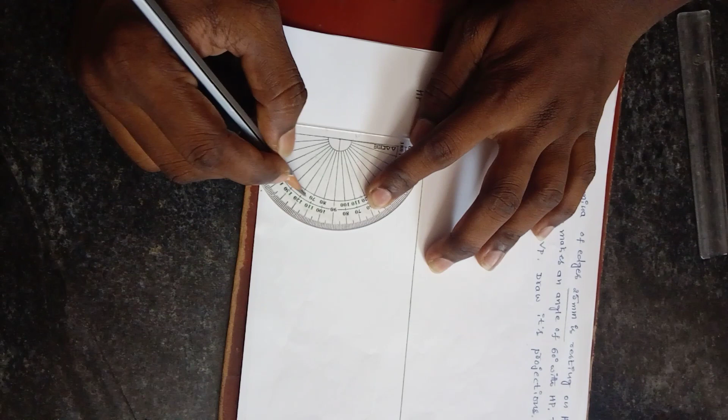Draw the pentagon according to the exterior angle method. The exterior angle of a pentagon is 72 degree. Measure from this side 0, 10, 20, 30, 40, 50, 60, 70, 72. Mark this point. One more from this end of the line: 0, 10, 20, 30, 40, 50, 60, 70, 72. Draw the thin line, then one more.

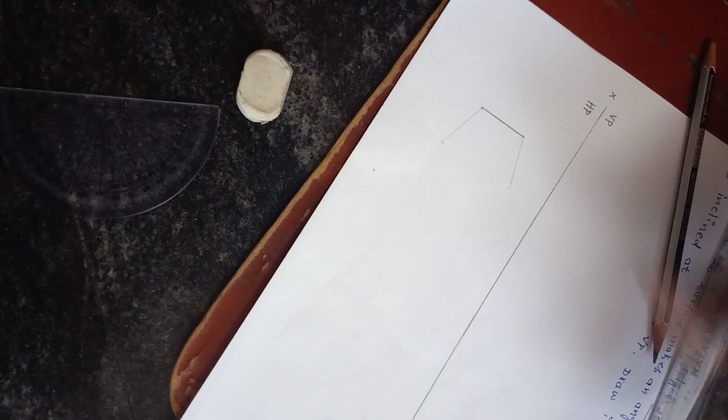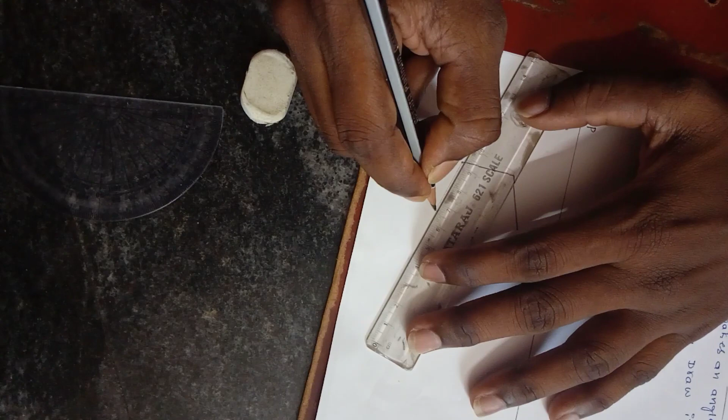By using compass, measure 25 mm of the line, cut it on the straight line, one more and one more. Okay, erase the extra length of the line. Draw a dark line up to this 25 mm line. Once again, by using compass, take this length of the line. We know that the length of the line is already 25 mm.

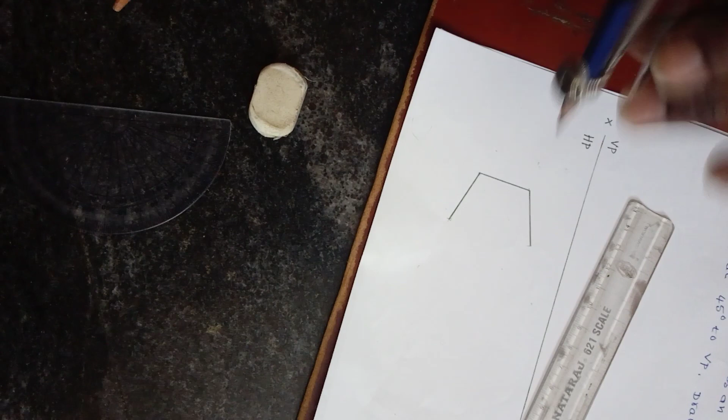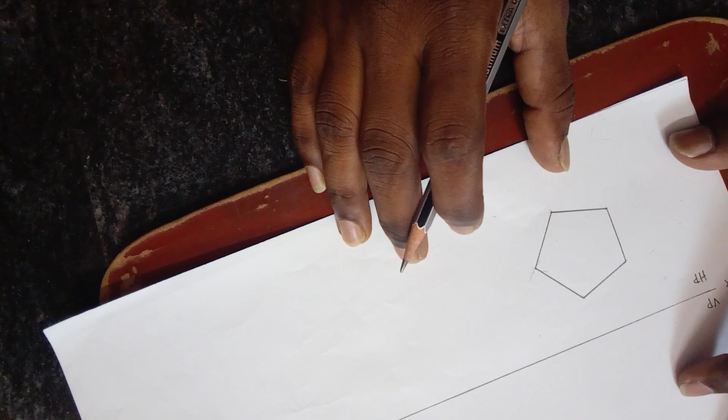Place the needle point, draw an arc, place the needle point here, draw one more arc where two arcs are cut. From this point, draw a line up to this point, draw a line up to this point. Right, now our pentagon is ready. Mark the points, means corners, since it is in HP. Top view A, B, C, D and E, and show one of the length

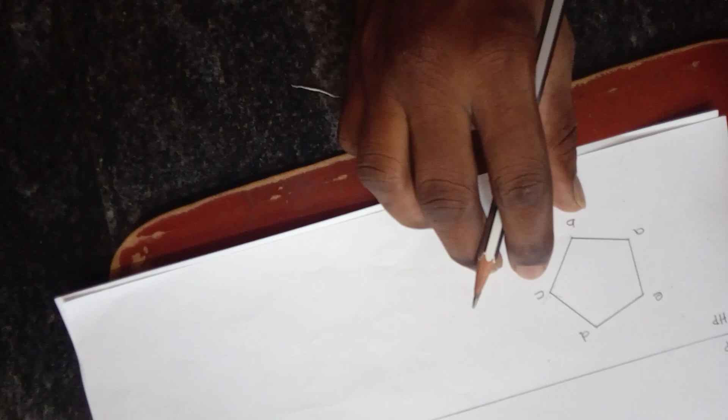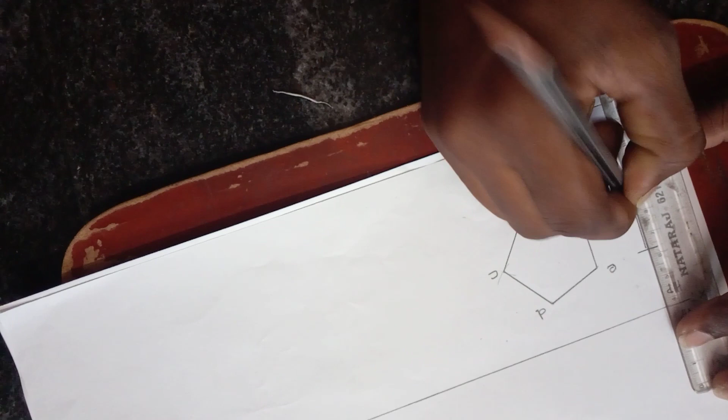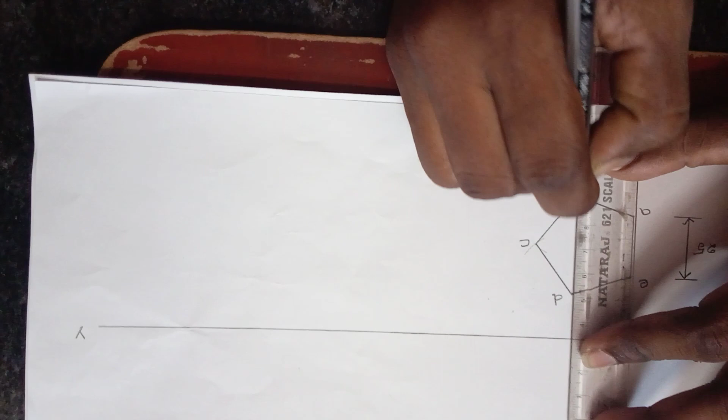of 25 mm. Now draw the projections from every corner up to XY line. The projection line passing from B corner also passes through D corner. Then one more from C.

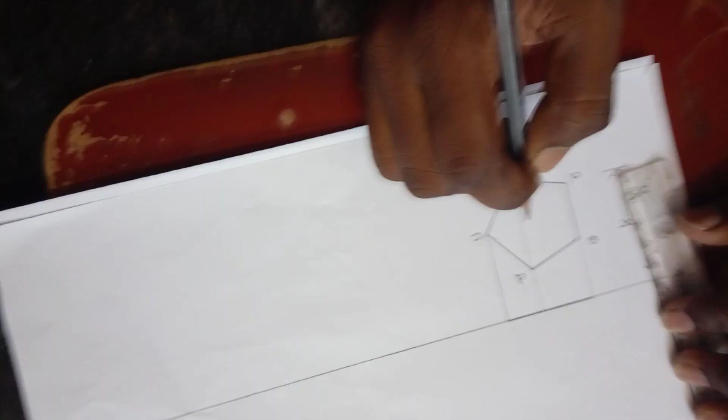Now when I look from this side, you are seeing the line which is the median of this pentagon. Mark this line as thick, but this is not a side of this pentagon, okay, which is in front view. When I look from this side, I am able to see only three corners, means A, B, C. I will write the first one. This is A dash, this is B dash, this is C dash.

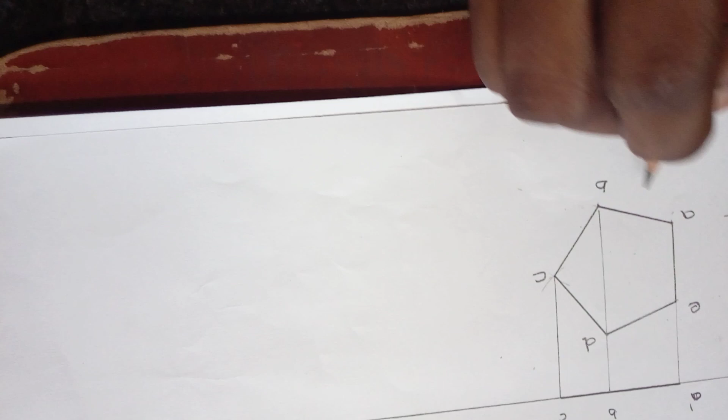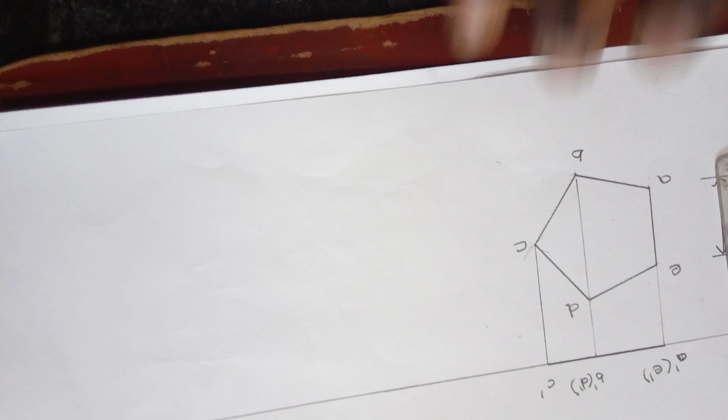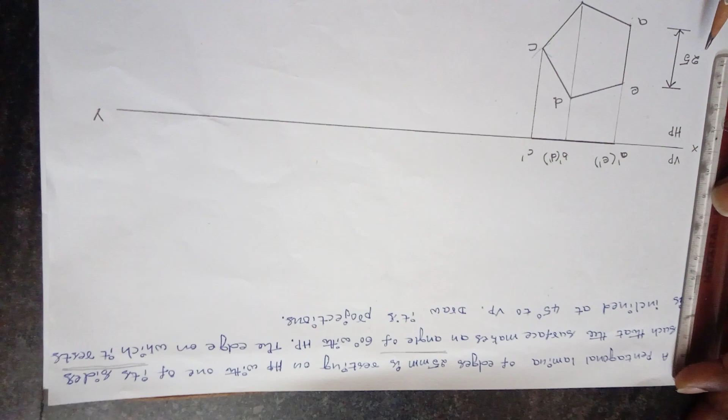While considering E and D, these are not visible, these are hidden in A and B. That's why I will keep in bracket E dash and D dash. Okay, first position is over. In the next condition, he has given two angles: one is 60 degree with HP and 45 degree with VP. Presently, we have to draw the angle in VP. We can take the HP angle, right?

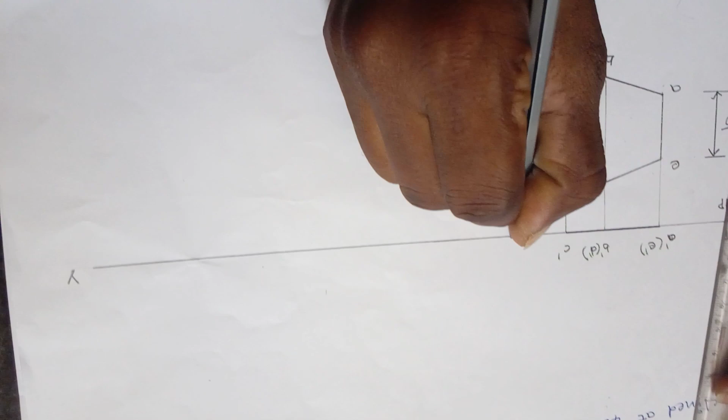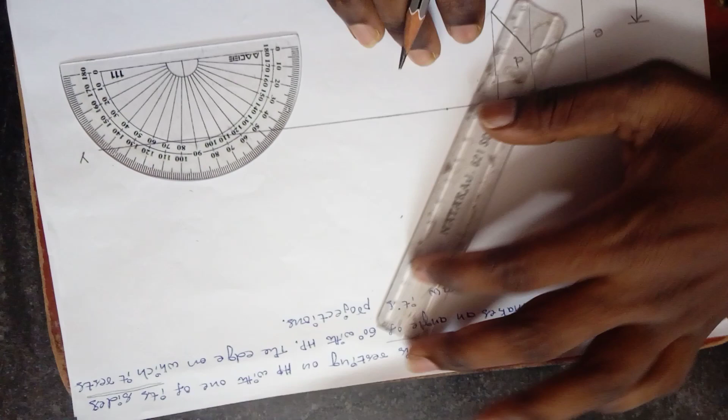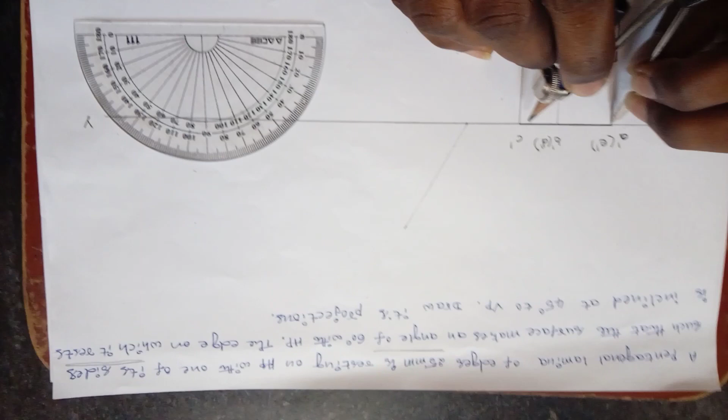I will place one reference point. Presently, I am drawing the angle of a line in VP by considering HP angle, means 60 degree. From this point, I am drawing 60 degree, place a point, draw a thin line, very thin line, right? Now measure length of the line from this point up to here by using compass. Place the needle point at this point, cut an arc on this line, right?

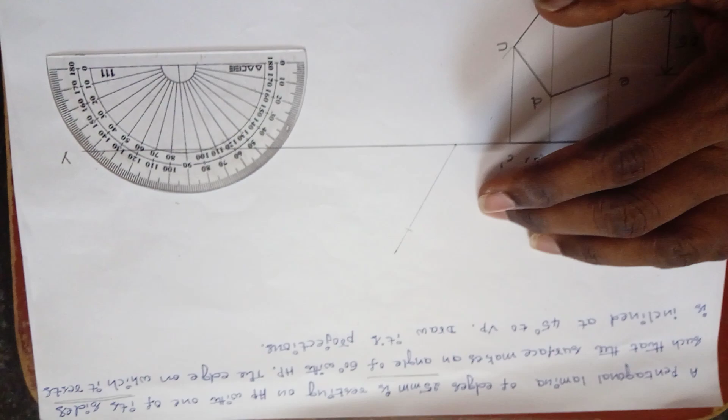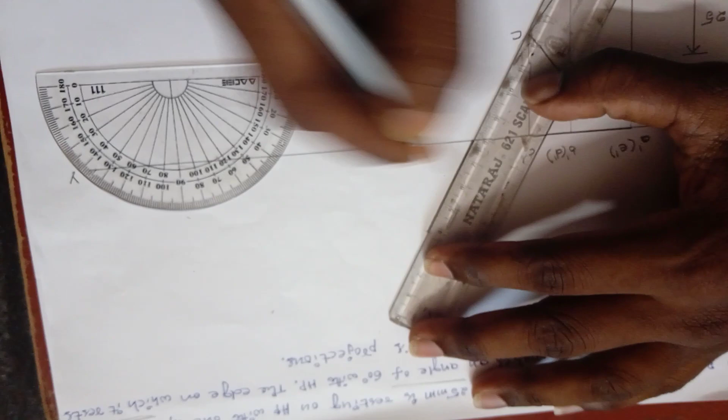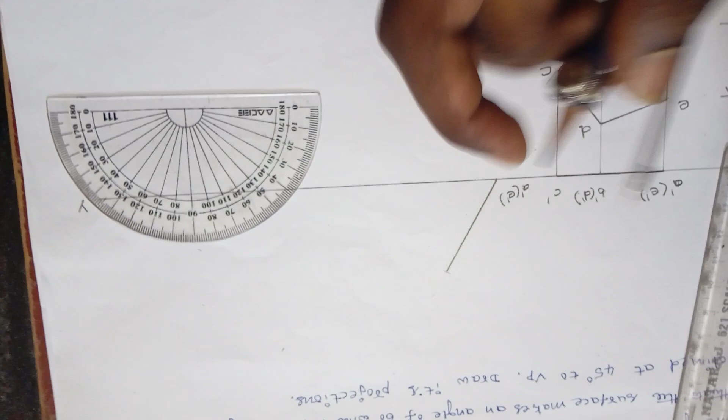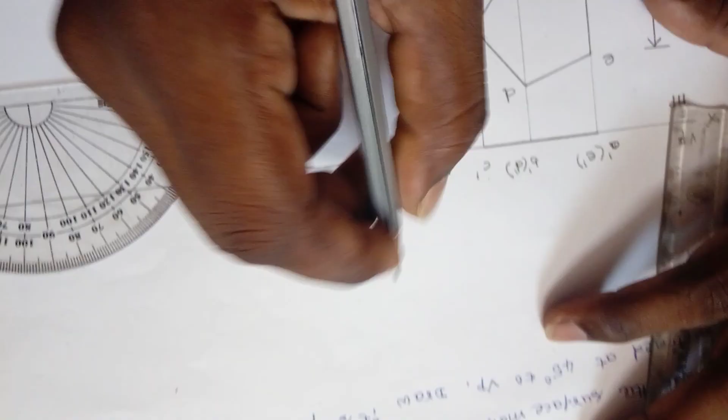Now remove extra length of the line. Make the line dark. This point represents A dash, bracket of E dash. Now I have to find from this point up to this point. Now I'm taking this distance and cut it on this line, right? This point represents B dash and D dash. Next, this point represents C dash. Now this view is over.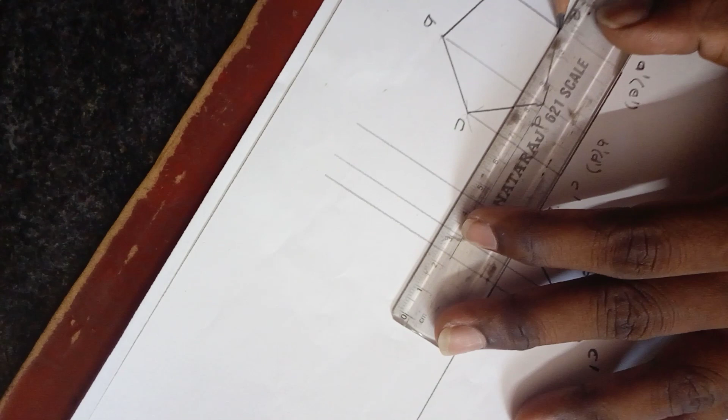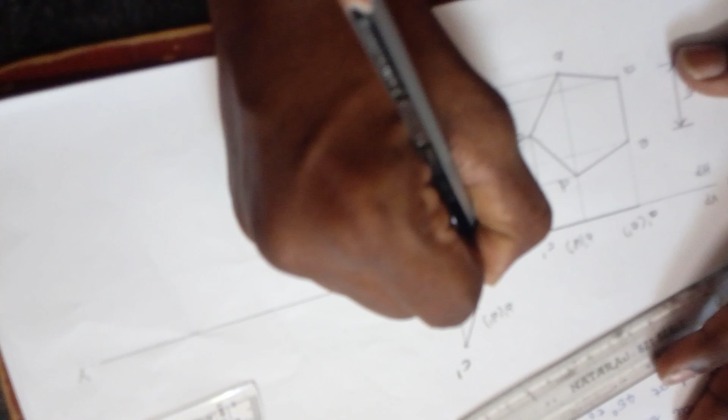Now I want to draw a projection line from VP up to HP. Draw one projection line, very thin lines, one more projection line and one more projection line. Draw projection lines from HP, one projection line, one more projection line, one more, one more and one more. Remove the extra length of the line, unwanted lines. Now mark this angle as 60 degree since it is given in question.

Now I have to put the letters in the second step, where this is A, this is A dash, where A and A dash will coincide. Mark this point as A. In the same procedure, this is B line, this is B dash line, means this is B. Next, this is C line, this is C dash line, C. Then this is D line, this is D dash line, this is D. This is E line, this is E dash line. Mark this point as E.

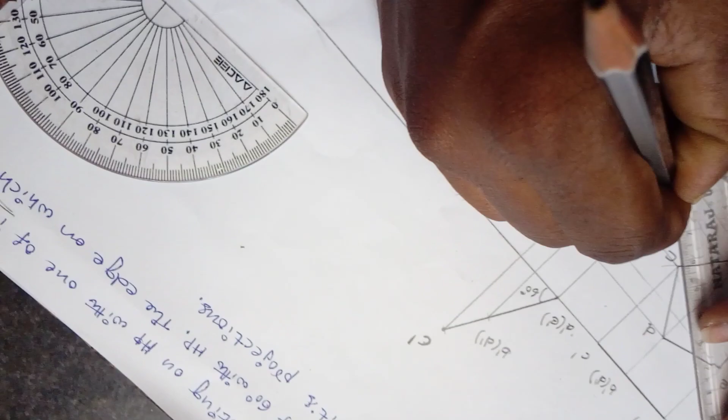Now connect all the points, first A to B, B to C, C to D, D to E, then E to A.

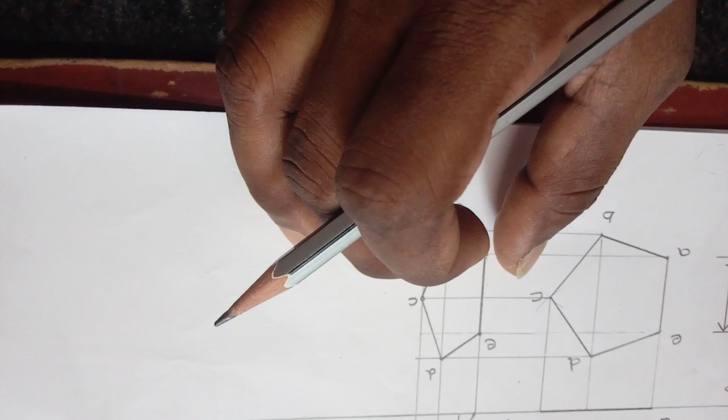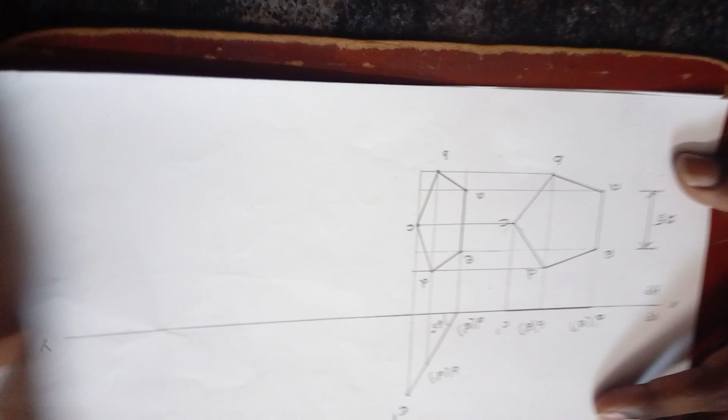Okay, by seeing the figure, you can observe the median length in the second step of the pentagon is decreased while comparing to the first step. Since here the median is making 0 degree angle with XY, but in the second step it is making 60 degree with XY line. That's why its median is reduced. Here it is called true pentagon. This is apparent pentagon. Means second step is over.

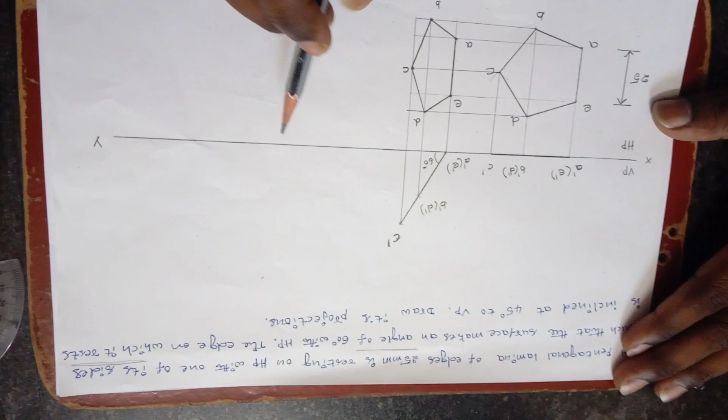Now we can proceed for third step. Before going to third step, observe the question. What is the next angle he has given? Next angle is 45 degree with VP. This 45 degree we can show it in HP. Place one reference point on XY line, mark 45 degree: 0, 10, 20, 30, 40, 45. Draw a line.

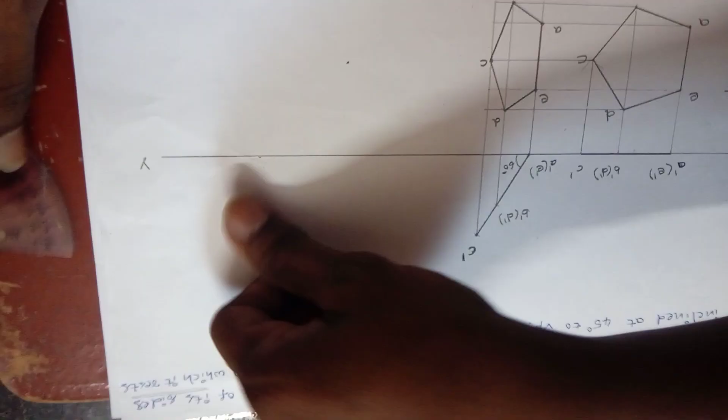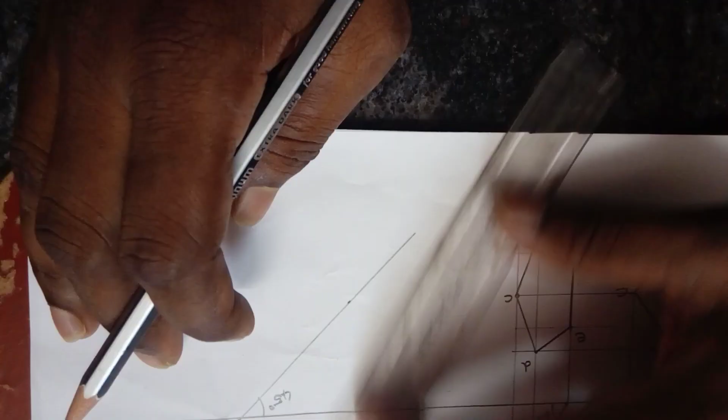Okay, mark this 45 degree. In the question, he's telling that the edge on which it rests is inclined at 45 degree. The edge, this is the resting edge of the pentagon. So I want to place this A and E on the 45 degree line. Measure the length. Automatically, this is 25 mm because this is also 25 mm. First, I will draw a 25 mm length of line on the 45 degree line. This is 0, 20, then 25. Mark it. This is E, this is A.

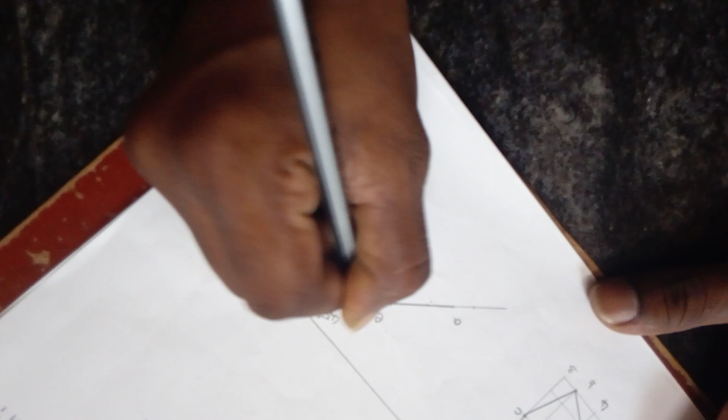In order to construct the third step, there is one more method you can follow, that is box method. Means you can first place a box, right? I will mark this box as 1, 2, 3, 4. Means 1, 2, 3, 4 represent a rectangle box. Now from E to 1, how much is the distance? I will measure with compass and mark it. Then one more. From this 1 and 4, near to E there is point 1, near to A there is point 4.

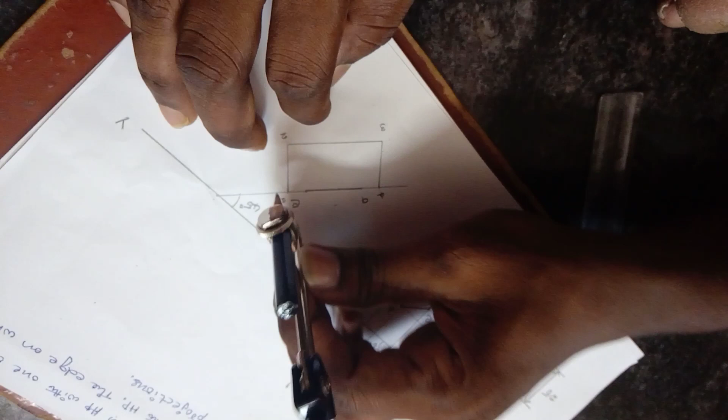Now from 1 to 2, how much is the distance? You can measure using scale. Measure it, I think nearly 20 mm, 20 mm below. One more, 20 mm below. I will complete the box. Now 1 and 4 is over, now it will become 2 and 3. Complete the sketch. While going from 1 to 2, there is one point, that is D. I will measure from 1 to D. This is D. This is the same distance compared to B to 4.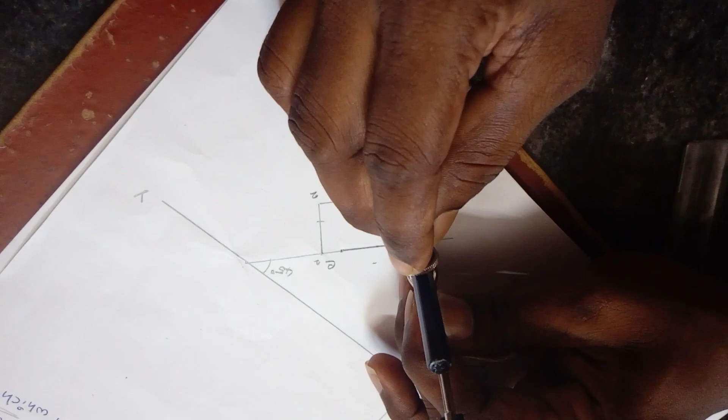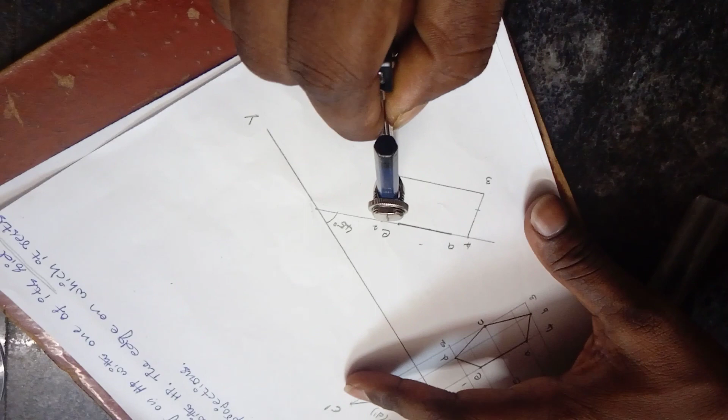While coming from 3 to 4, there is B. 1 to D is equal to 4 to B. This is 4 to B. Now one more. While coming from 2 to 3, there is a point C. By using compass, measure from 2 to C. This point is C. This is D. This is B. Now I will connect A to B, then B to C, then C to D, then D to E. Now, according to the condition, the resting edge is inclined at 45 degree to VP.

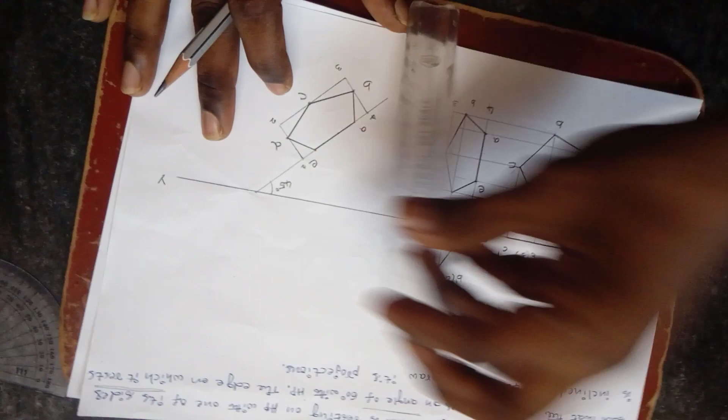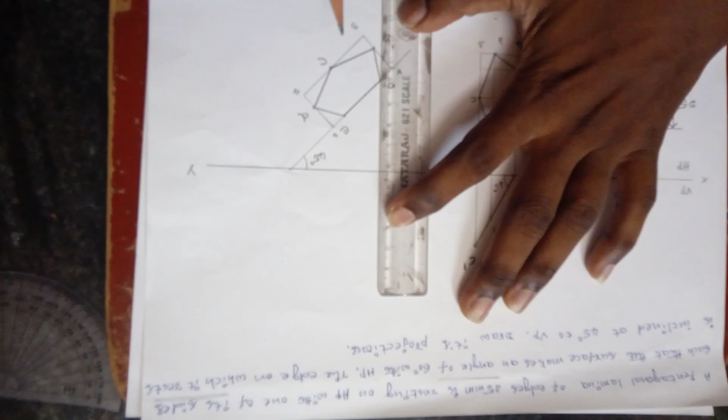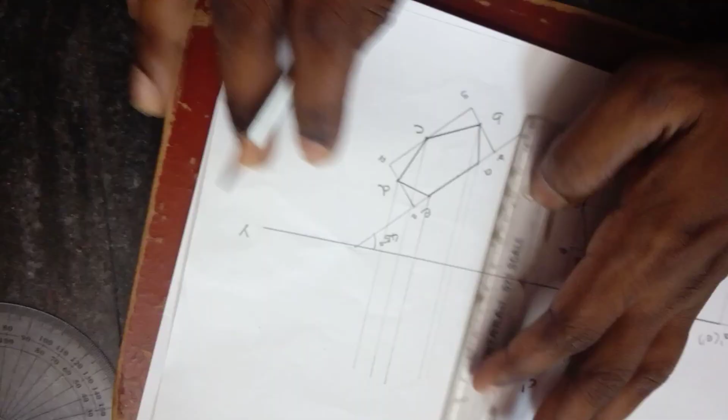The next step is extend the projections from HP to VP. Draw the projections very carefully, very thin lines. First projection line from A, then next projection line from B, then from C, next from D, next from E. Now this one is over. Now draw one projection line from above. Remove the extra lines. One more projection line is coming from B dash. This is the projection line.

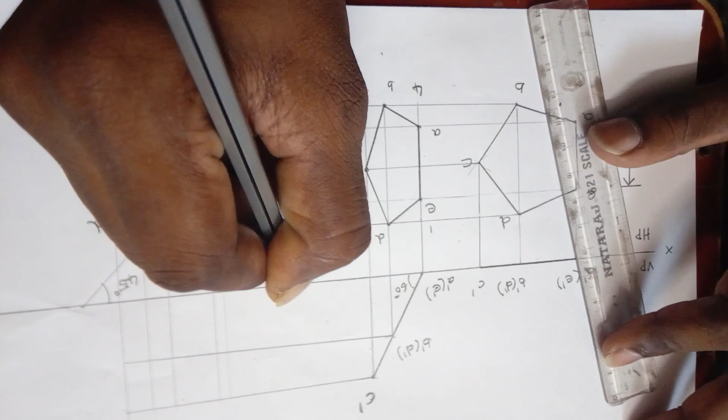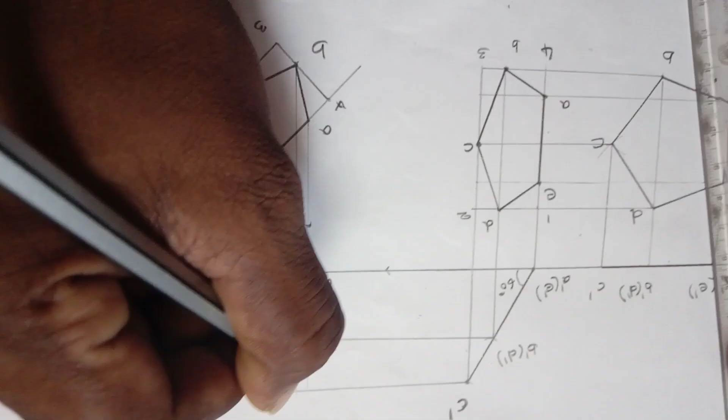Now this step is very important to complete. I will start from A, this is A line. You can search for A dash line. This point represents A dash. This is B, this is B dash line; this point represents B dash. Then this is C; search for C dash. This is C dash point. Next, this is D; search for D dash. Mark this point as D dash. One more is E. Search for E dash. This is E dash. Now I will join all the points from A to E.

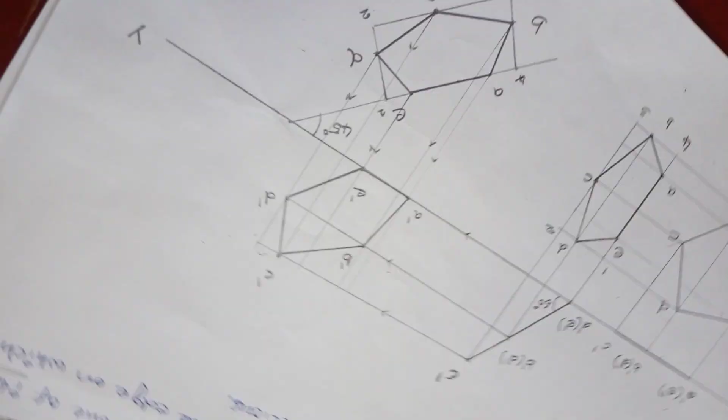Okay, now A to B, B to C, C to D, then D to E. Now the projection of the pentagon according to the conditions given in the question is complete. This is the final answer.